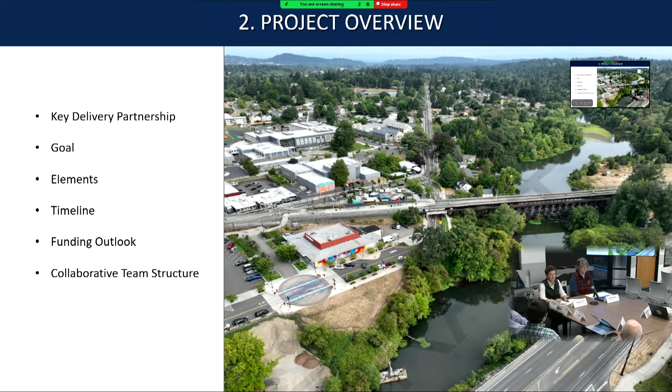Okay, so first up on project overview, we'll talk about the critical partnership that's needed to deliver this project, the project goal, the design and construction elements to achieve the goal, the project timeline, the funding outlook, where we stand now, to Robert, your question, and then the collaborative team structure that we have going on. So here are the four entities.

I know you're very familiar with these four. This composes our leadership team. Without any one of these entities, we would not be where we are today. So we have the Oregon Department of Transportation. No one else can actually hold a contract to construct a state highway bridge other than ODOT. So ODOT's involvement has been absolutely essential, dating back to Tova Peltz in 2021, and it's been a great partnership. ODOT owns the State Highway Bridge, and then we have the City of Milwaukie, owning most of the project footprint.

And obviously the outcomes of this project, the benefits of this project, are going to be realized by the residents of Milwaukie and the surrounding community. So not without the City of Milwaukie, that's for sure. Then we have these NGOs, right? So we have the local community presence here with the North Clackamas Watershed Council, who just brings so much capacity with community engagement, and Neil's done a great job of securing that initial seed funding and really demonstrating that community support. And we'll have a funding slide that really shows that here in a bit.

Combined with American Rivers, who brings dam removal experience and experience managing large-scale restoration, as well as leveraging funding dollars that are not traditional to ODOT or the city in the restoration realm, and bringing that project management expertise has been really key.

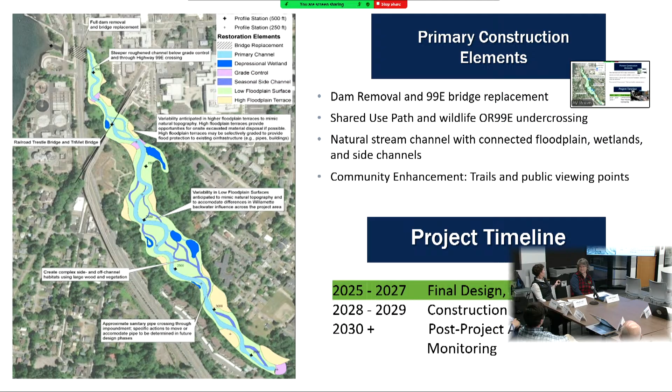So we can't control everything, right? And like you said, there's been some wrenches thrown in since January of this year. So what we can control is we have this funding and we can get the most value with that money and complete final design and get everything as planned and as far along as possible, so that even if we are not able to secure all of the construction funds, we'll be able to pick it up and save a lot of money when the project can be constructed. If we don't get all the funding, we're still motoring towards that goal. And we'll talk a little bit more about that later.

Other things about this. So thank you. In your letter, you clarified how the city's funding that was provided, the $1 million, is from the URA funds and how that could be spent. We understand that can't be spent on sewer relocation or in the upper impoundment, but needs to be spent on the lower portion of the project. We didn't have that information, so that was really, really helpful to hear.

That $1 million is so important because it really demonstrates the city's commitment to the project to other partners and other funders. And it really helps leverage additional funding. So it's helped leverage the Metro funds. And then collectively, the Metro funds and the city funds are really useful for leveraging those federal dollars because they're non-federal. So $1 million is not nothing, right? For this project, it may seem like a little drop in the bucket because of the price tag, but it is so critical coming from the city to have that funding.

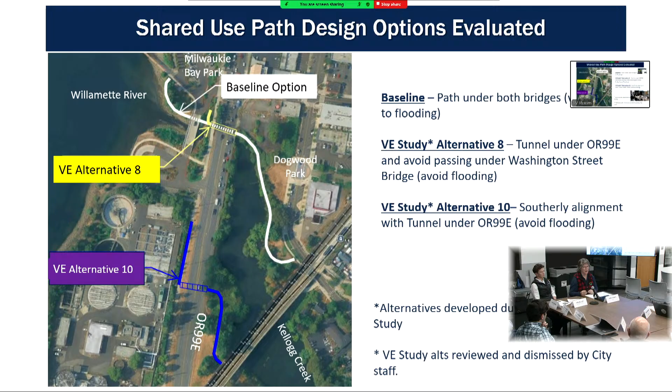But the problem is that the ADA design cannot be met coming up between the two bridges, and a tunnel is very confining and concerning. We'll go into more detail there. They also looked at another alternative with a tunnel all the way south. That ultimately doesn't meet the goal either, because it doesn't connect the parks. But that gives you a sense of what the VE team was looking at.

So let's go back to the baseline concept. This is the plan view alignment. It starts where the marked crossing is at Milwaukie Bay Park, drops down underneath the Washington Street Bridge, goes underneath the new OR 99 bridge, and meanders along. I have the Coho Point developer's preliminary wall in there because that was influencing what we were doing. Coho Point timing is a little up in the air, so it will probably be less of a constraint. But at the end of the day, it comes up to Main Street.

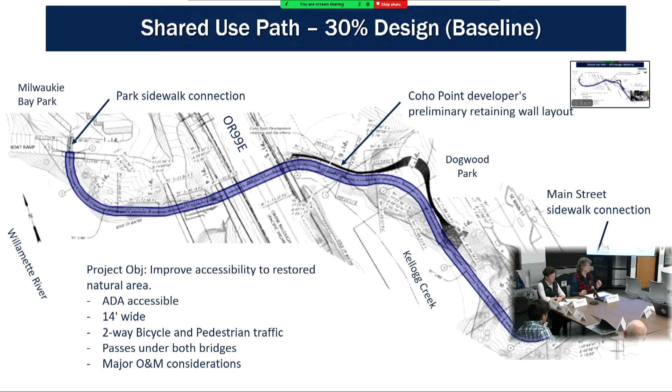It's a 14-foot wide path. We're following ODOT's ADA design standards for width, for maximum grade. So this would provide two-way bicycle and pedestrian traffic. Like I said, it passes under both bridges, but there are major operational and maintenance considerations that you're going to see here shortly. And here it is.

Is that the bridge, that's what you're calling the bridge in the park? Yes, sorry. We've never called it that, so that's a new name to us. Okay. It has several different names, so I apologize. I think on Google Maps, it is called Washington Street, and Tessie actually once asked me, can we change that? That makes no sense. It makes no sense, yeah. What do we call it? The Milwaukie Bay Park bridge? Whoever provides the funding for this, we're gonna name the bridge after.

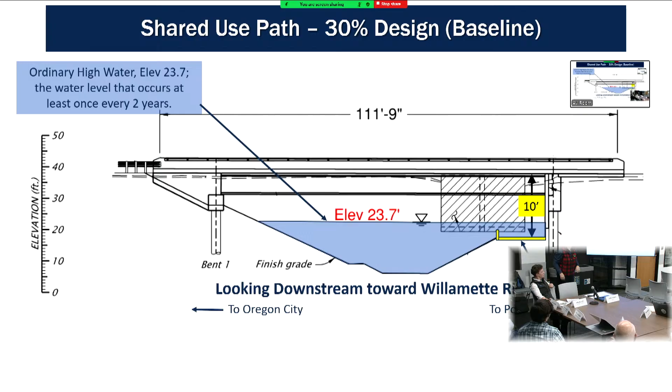But this channel is essentially going to be the same channel that we carve out underneath the Washington Street Bridge as well. But yes, the trail will have more inundation. It'll be deeper, it's lower. In fact, let me go back. Here's the Washington Street Bridge, so you've got that much flooding, and then here's the 99. It looks like it's over 5. Yes, about 6.5 feet of flooding, almost 7 feet of flooding.

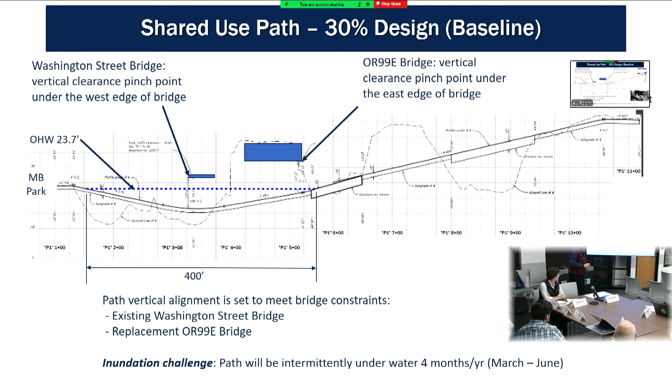So again, I don't want to be overly dramatic, but from a maintenance and operations standpoint, these are important things, I think, for the city to think about, to make sure that you're realizing everything that you want to realize with this project. It's going to take resources to manage, and we understand. Yes, that's a good range.

I don't think we have to solve that tonight, but you have to realize that there's a couple ways to skin this issue. If you want to be super responsive, then you're checking the weather all the time, you're checking the water level, you open it and close it. That's quite frankly manpower intensive and quite frankly risky.

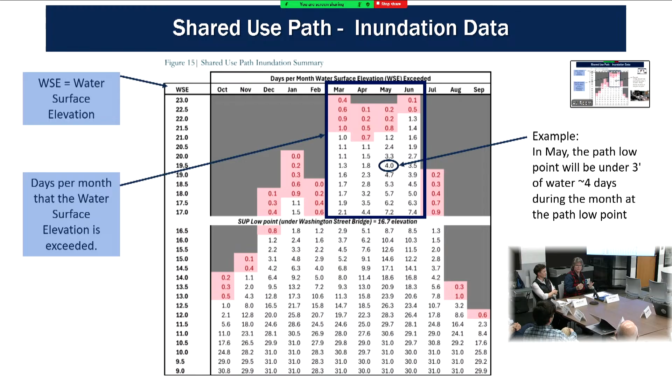So what does that closing look like? Is it bollards? Is it a gate? And that's where it comes into the design consideration. You can crawl over a bollard. You can't, and so if the city really wants to close it, that's, I think, the thing: what does that look like? So that we make sure we consider all of those things in our design.

So I just wanted to show you a little bit of a close-up of these value engineering alternatives. All that data, that's what the value engineering team saw, and they went, oh, holy cow. Can we come up with a better way to do this and still meet the project objectives? And at the end of the day, they had an idea for a tunnel under 99, but the connection grade that you can see between the two bridges doesn't meet ADA. So it's infeasible.

And the tunnel that's 10 feet tall and 16 feet wide and 115 feet long would be incredibly confining and probably a safety concern for the city as well. So with that curve, it doesn't meet the 10% grade.

So I was thinking, could it go across the actual existing bridge somehow? But that wouldn't be. The grade we're looking for is 4.5%. So this is more than double, twice as steep. Yeah. The other issue that one of my funny engineers said, if you did this, you get a kid on a skateboard coming around that corner and then whammo right into the tunnel. That's probably not a good thing.

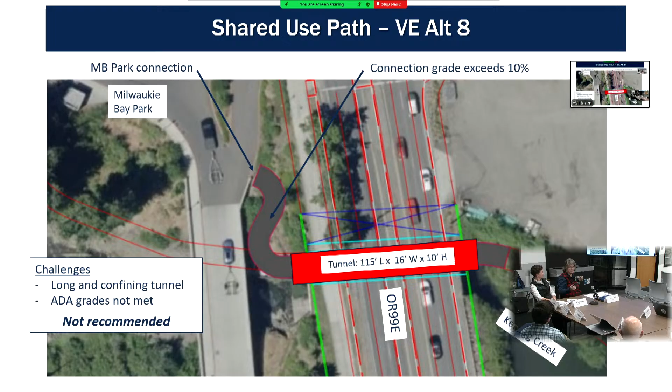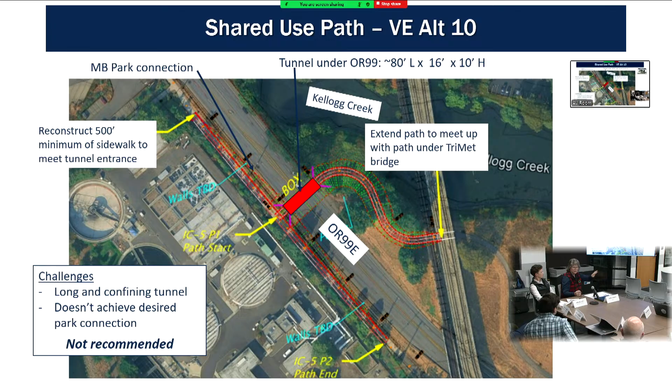So at the end of the day, not recommended, and I think city staff supported that as we talked through it. And then just another close-up of the other value engineering alternative. This one is another tunnel, but it doesn't achieve what you're looking for, which is an open path to enjoy the restoration. So we just went, okay, thanks, but no thanks. So not recommended.

Okay. If the tunnel is up, and it's above that floodplain level, could it conceivably be open, like at 4 feet or something, and have an open view? Or no? No. It would have to be fully enclosed, yeah.

One of the things that happens, and we talked a little bit about some solid rail, like why can't you use some solid rail, almost like you go to an aquarium, that's really cool, you see the water on the other side and you're walking over here, but as the water comes up, you end up trapping fish. So it helps for certain things, but it doesn't help for others. Yeah, I think the debris. Yes, debris. To get your permits, the regulatory agencies really want to see that debris can pass through there and everything.

So where we are, to kind of summarize what we're doing with the shared use path, we're continuing to advance this baseline design concept. I think it's the closest to achieving the goals of the project, but it's going to need some active management and some city resources when it's actually in use. And the design team needs to understand what that looks like, so we can work those things in.

And then I wanted you to recognize that it's about a $100 million project. It's a $15 million path. This is 15% of the project. That's a lot. So we want to make sure it gets done right. If that amount of money is going to be spent, let's make sure we do it right. And we just want to make sure we're not picking up a design and putting it back down, or making a change because another decision was made. So as we're involved with meetings with city staff, we're just asking for a little bit more input on the maintenance and operations.

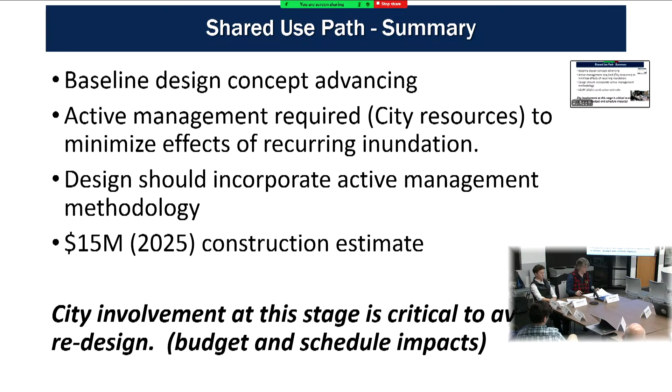Okay. Is it okay moving on to the sewer line? Not nearly as exciting. I'm sure this path is way more exciting. We love wastewater here.

Can I clarify some things with the shared use path? You're saying a retaining wall or something to make it flood for fewer days per year isn't possible because debris would be caught or fish would get caught in it. Correct. So there's really no way we can design around this. The path will have to flood for about a month every year in total days. Yes, across the 4-month period.

And it might be worth hearing from Shelley, being in the transportation realm, about other bridges that have trails under them and some issues they've experienced. Yeah, there are tunnels over in Portland, there's been homeless camping, there's been people who have experienced assaults or crimes. And so it becomes really challenging from a maintenance and a public safety perspective. So that's something you may want to consider when you're talking about the tunnel. You can put flood warning signs, but 3-4 feet of water, that's pretty significant.

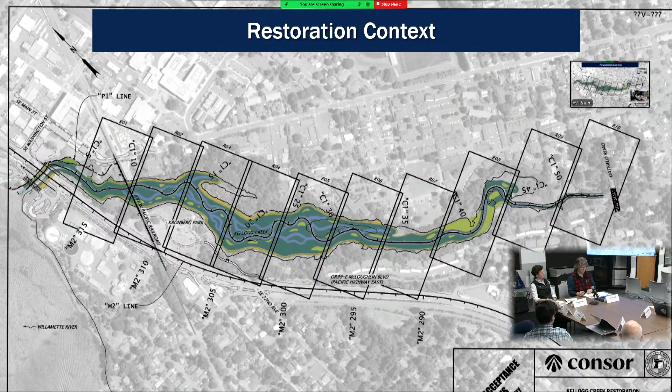Okay, so it all starts out with trying to make sure that we're achieving the restoration outcome that everybody wants. And the creek restoration is really split up into 3 different reaches, which I'll show. But here's a nice glory picture of the impoundment, and then Inter-Fluve did this fantastic graphic that really shows what you're trying to achieve. It kind of warms the heart, like, this is why we're all here. So that's what we're trying to get to.

So as I mentioned, the restoration design really considers 3 reaches in the engineering terminology. There's an upper, middle, and a lower. The upper is really connecting the existing creek at Oatfield Road down to the sewer line crossing. That's a point where the dynamics of the creek change. And so you can see it's kind of just a creek in the upper reach. It's primary, secondary, tertiary channels, lots going on in the middle reach. And then the lower reach is just connecting into the Willamette River.

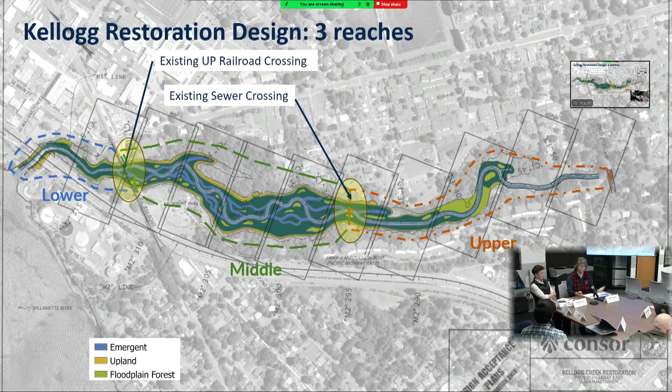But because of that change from the upper to the middle, to really achieve what we're all trying to do, the sewer line is just at the wrong elevation. And here's a profile of that. The dash line at the top, another engineering drawing, is the mud line, if you will. That's where the soils are today. And the lower solid line is the creek channel. You see some little dips down, those are pools and riffles and all kinds of restoration stuff. But I'm pointing to where the sewer line sits today, its elevation. And it sits squarely above where we want the creek profile to be.

I think one of the questions that the council asked was, have you looked at adjusting the creek profile so that we don't have to do anything with the sewer line? And the answer is yes. From an engineering perspective, if you try to raise the creek channel that you designed, you're not going to achieve as much in the middle zone, which has all the different channels; that's where the money is in this. And then the upper reach, you end up having to chase up Oatfield Road further. So you extend the project way up Oatfield Road, and it just becomes more complicated. So that Oatfield Road location is a very convenient connection point.

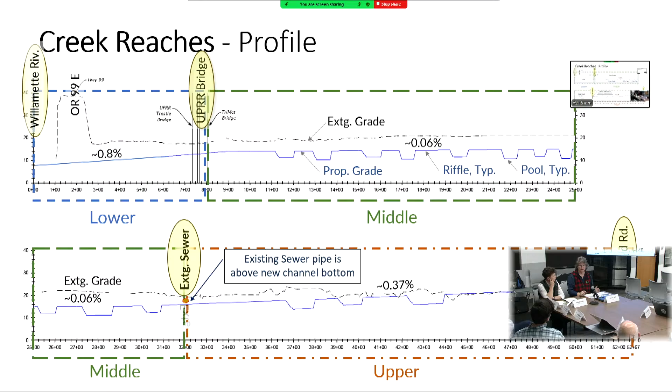And then if we dropped it down to where there was enough clearance and leave the sewer line in place, at the westerly end of the middle reach is the Union Pacific Railroad Bridge. And so you end up adding a risk because you're excavating more at that location, which is going to be a concern. So all that to say, we think we're in a sweet spot here with the restoration design. It's been scientifically designed from a maintenance perspective and a natural adaptability standpoint. We're trying to achieve a design that you can put in place; it's not gonna be maintenance free, but it supports itself. It has the right grades, it's natural, and it becomes its own thing.

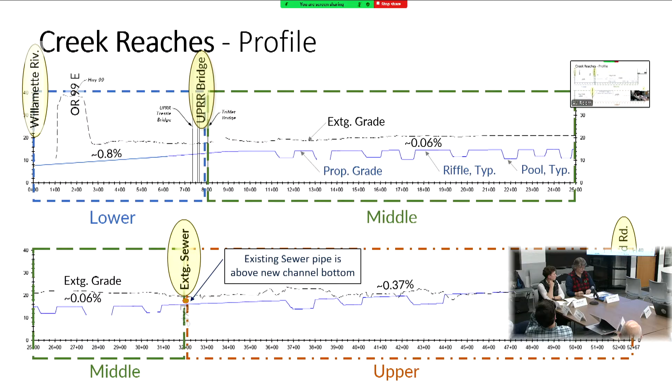So what we concluded is, something has to happen with the existing sewer line. So here we are. This shows where the sewer line is. It takes sewage from an apartment complex underneath Kellogg Creek into a county WES system out to the water treatment plant. Is it taking just from an apartment complex, or is it taking from that whole area in the yellow dots? It doesn't take from all the area in the yellow dots. Peter might be able to... I mean, it's not the full area, but you can see.

I think it's pretty extensive though, maybe not all within that sewershed, but primarily. It's not a single facility. Yeah, we've got several lines that all converge. And it's an 8-inch line, so it's not tremendously large. I'm sure you have larger facilities than that. Right, yeah. 8-inch sewer line.

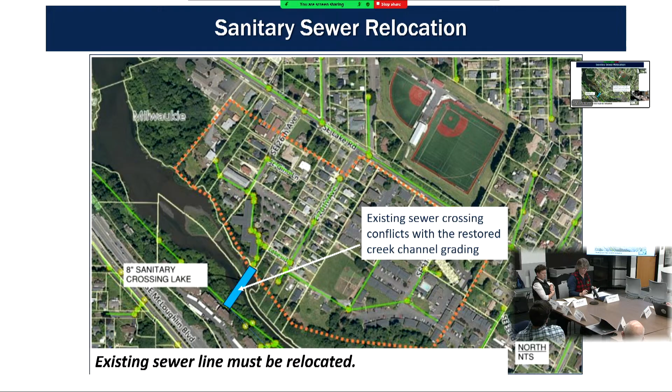Okay, so when we started analyzing, and we have subject matter experts in Consor who I think have worked for the city and worked for a lot of cities and a lot of public agencies in the area with sewer systems. It's a gravity flow system that connects into the WES pipeline, as I said. The city shared with us when we came on board some inspection data, and I think somebody tried to run a camera through that line, but they hit a spot where the camera couldn't go any further. And that typically is due to either a blockage or there's some sort of sag or kink, if you will, in the pipe. Neither of those is.

So we've been talking with city staff about, when would that pipe naturally need to be replaced? I think we have maybe a little bit of differing opinion. We think it's closer to 10 years. I think city staff think it's closer to 20 years. But at the end of the day, you're still within your planning horizon. So if this pipe was to be replaced, it's not being replaced prematurely.

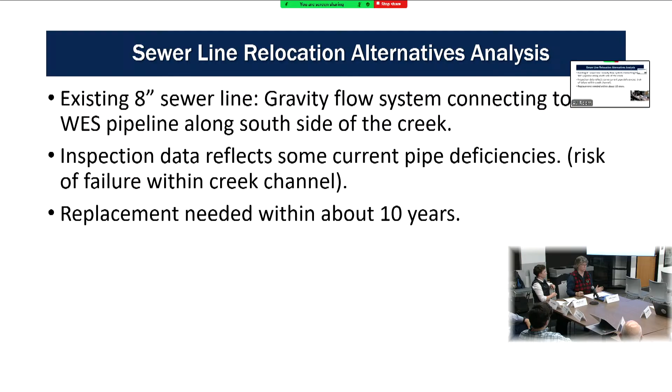So we looked at adjusting the creek profile, so there was no relocation. I talked about that really wasn't feasible. We looked at alternatives to take the pipe on its current alignment, but just go underneath the creeks, like way down underneath the creek, and then over the creek, and then out of the creek, that's the relocate the sewer line. It's like just move it out of the creek.

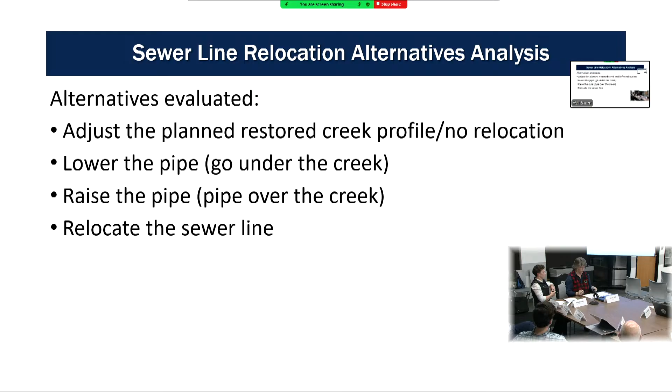So as we looked at those alternatives, we worked with city staff to look at not just what the current sewer flow rates are, but what's planned in the future. So we make sure that we're thinking about the size appropriately, making sure we're meeting the project objectives, minimizing city long-term costs and liability. That's always a consideration. Construction cost and timing. And then again, there's costs that are coming your way at some point. And so the costs we're looking at are really within the horizon.

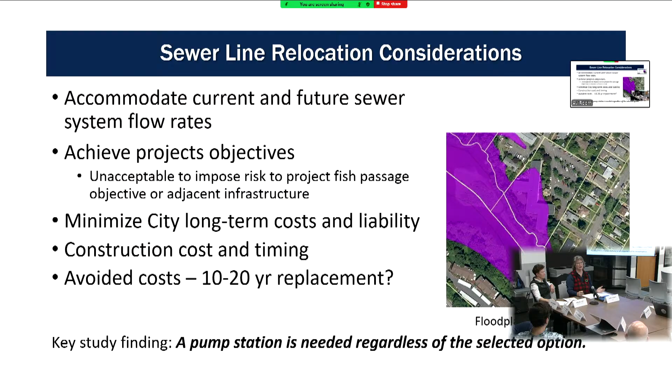And one of the key study findings is that no matter what we do, we can't maintain a gravity flow, which is the simplest, the most cost-effective system, if you will. You're going to have a pump station under any circumstance. So the major options, kind of talking through lowering, again, can't do a gravity system. We need to have a pump station.

We looked at a pressure system, and okay, I will say I am not a sewer line designer, so I don't know what all these mean. Jen and Peter probably know a whole lot more to answer those questions. But a pressure system also isn't feasible because the flows are too low. So you need a new pump station and you need a new force main. So we do have a feasible option that goes way down underneath the creek. And I think actually the pressure system should be siphoned.

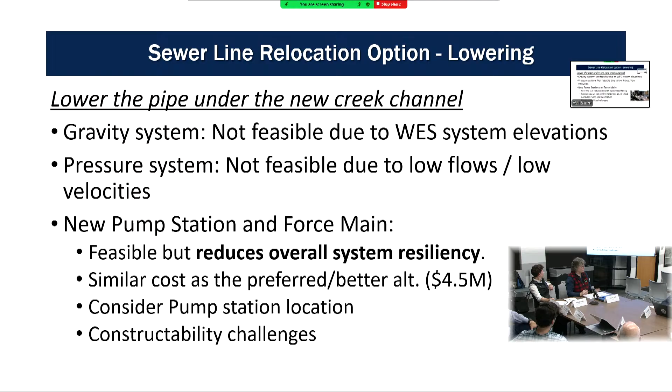Oh. Thank you. Yes. So I want to acknowledge that there is an option that goes way down underneath the creek, but it's a similar cost to what we're suggesting as a recommended alternative. And doing that way down underneath the creek has several constructability challenges that we would have to face.

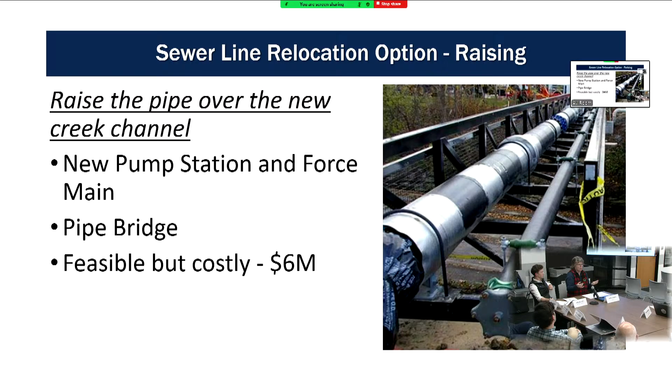So raising up and over, this is what a utility bridge looks like. It's feasible, but it's very costly. And you end up with this kind of eyesore, and as the creek comes up, you're gonna always worry about debris and kind of attractive nuisance.

So when we looked at realignment, we think that that's really the best option. Get the pipe out of the creek, tie into the existing system, add a new pump station with a force main, and we can work with city staff to figure out where's the best place to put the pump station. But I think this really provides the lowest risk overall, has the best value, and it provides the best long-term maintenance and operations because it's out of the floodplain. We can set it up to where it's accessible by maintenance staff, and if there was a problem, you're not having to go to Pleasant Street.

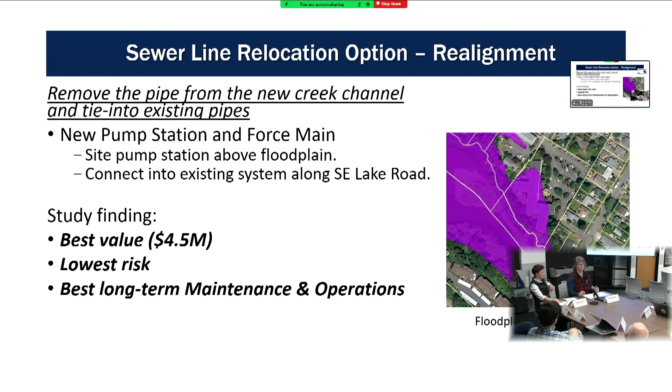So this is the alternative that we're recommending to staff, and I cannot reiterate enough that we are still working through all of this. There's no decisions. We're not looking for an immediate decision. There's still a lot to talk through, but this is what we're suggesting. Here's the solution. Pump station at the end of 28th, and then it connects into the existing system, replace some sewer lines, and then it sends the flow up to an existing system on Lake Road.

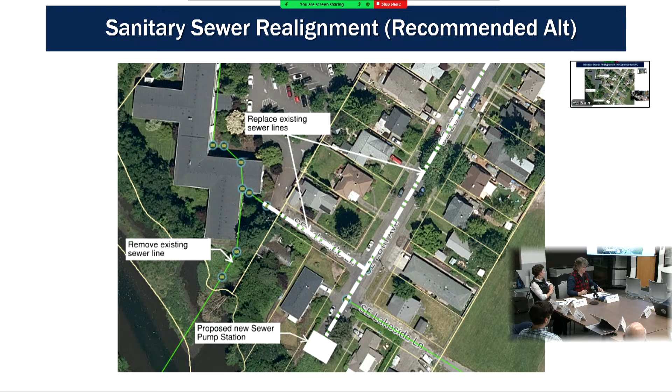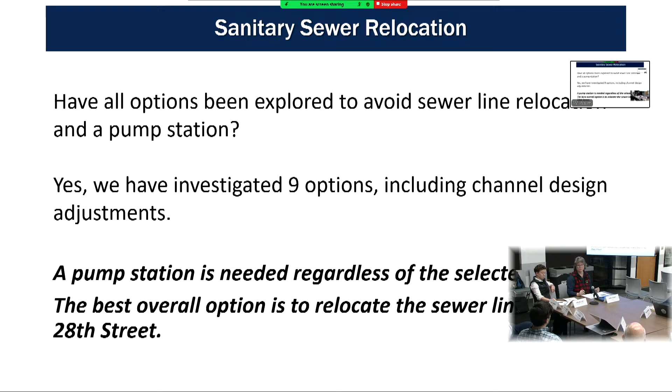So kind of going back over some of the questions: have all the options been explored to avoid relocation and a pump station? Yes. We investigated a total of 9 options, including a channel design adjustment. A pump station is needed regardless. So a pump station just is not going to be avoidable in any circumstance. And we believe the best option is to move the sewer line and put the pump station up on 28, and that's what we were showing.

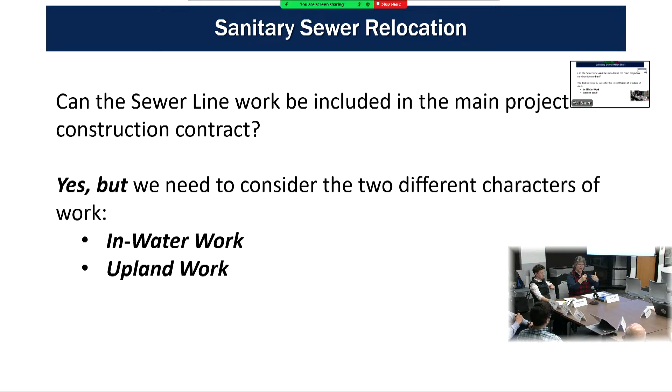I think one of the other questions, and this one we're not able to answer, but I'll give you a little bit more information, just things we're thinking about: can the sewer line be included in the main construction project? The answer is yes, but there's a big but there. There's 2 different characters of work going on. The water demarcation of elevation 23.7 is very important from a permitting standpoint. If you're working below that, you have to get in-water work permits. Above that is upland. We call that upland.

Sorry to interrupt, but the permitting for in-water work is extensive. It takes a lot of specialized expertise. We had all the permits you would need from local, state, federal agencies to just do the sediment sampling, like 13 permits. It is a lot. It costs a lot of money. We had specialized amphibious equipment. So depending on what alternative is chosen and how things shake up, it is a big lift. That effort alone was close to $3 million.

And when you think about replacing the sewer system, the existing system has to remain in place and operational the entire time you're building a new one. So you build a new one, and that's all the pipe work and everything. Then there's lots of testing, and then there's connecting it, and then there's removing. In order for our main construction contractor to really start their work, they're gonna start at the upper end. If you think about lowering the lake, they're gonna work from the top down. So the sewer line getting out of the way is a very early critical item. So there's a scheduling risk with when that's able to be removed.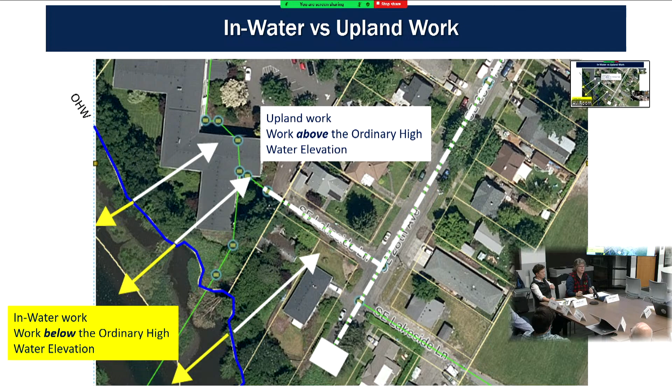Removing the pipe would be in-water work, and the restoration is all in-water work. So we're working through the permitting for that. So it's sort of a no-brainer to include removal of the existing sewer line, when it's ready to be removed, in the major project, because we're already accounting for that permitting, as April just said, numbers of permits and cost. But the rest of the work is upland work. It's not permit free, but it doesn't have the same in-water permits.

Okay, so I think what I want to leave you with is we think there's a lot of long-term maintenance and operation cost advantages to getting the pump station and the new infrastructure up out of the creek. It will help long-term, but it also helps with the work that needs to be done in the creek. There's still a lot of discussion with city staff, with ODOT staff. I will leave it at that. We can't solve everything. It's going to end up being probably a risk-based solution, risk assessment. We're looking at it from all the angles.

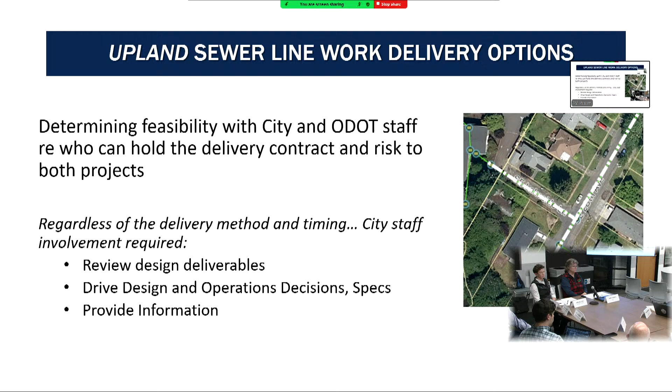Yeah, it was incredibly helpful, and I super appreciate how you distilled the complexity into something we can address. I know you said, Karen, we're not answering it tonight. We've got a lot of work still to do, but I'm sure you've heard from my staff, we have a capital improvement budgeting process. So is there any sense you could give us on milestones or deadlines for when you need to know various things? I tell my staff they can't make commitments to you unless we get direction from council. Any clarity on when those decision points need to happen is really helpful, so we can engage most effectively at the staff-to-staff table.

Yes. Well, that's a great transition into the next slide. I'd say right now, the work that Peter and his folks are planning to do to evaluate capacity, the downstream siphon, and some of the input they're going to be providing is what's really needed right now.

Okay. While that's happening, we're going to be working on this delivery pathway angle, because we're just looking at major risk to both projects, right? And needing the sewer line to be online before the restoration work can even start. And then try to convey that to funders. They're just like, do we want to fund this? So, there's a lot to be done.

But stepping ahead to next steps, kind of down there at the bottom, one of the biggest things that Peter took back to his team was looking at the clean water revolving loan and saying, hey, what benefits could we get from pursuing this? And then I would be working with Peter on how we can leverage existing funding that we have and things like that. And then at that point, if it's beneficial, adding the sewer relocation to the CIP before the April deadline, because we have to submit that application in April, would be the timeline we're looking at for the next step.

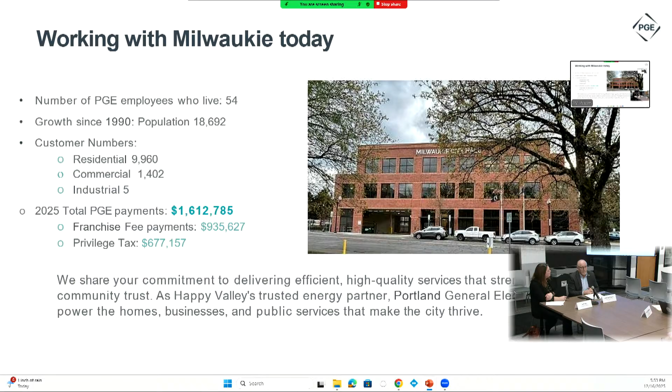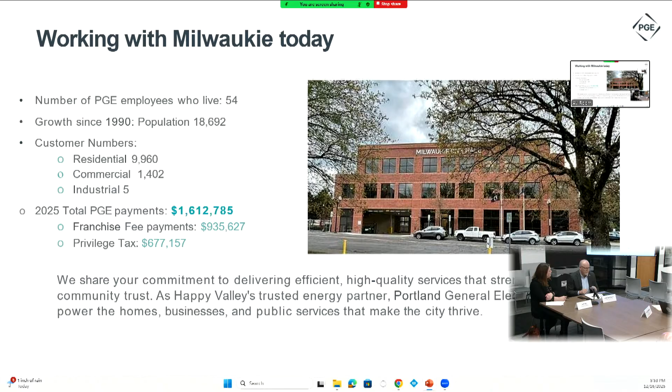So that's where I'll spend my time. I can't wait 21 years. I don't think I have that much of a career left. So I mentioned those things to say the system is changing. The dynamics of the system are changing. We talk about, again, storms, extreme weather, cyber attacks, earthquakes, a Cascadia subduction zone earthquake.

All of these emergencies, if you will, weather, attacks, et cetera, we're trying to think: how do you get resiliency? How do you gain the sort of reliability in the system that we need? Because we are all dependent on this commodity, and it's really important for us to maintain that resiliency. And so we're trying to dig in each of these areas and say, how do we harden this?

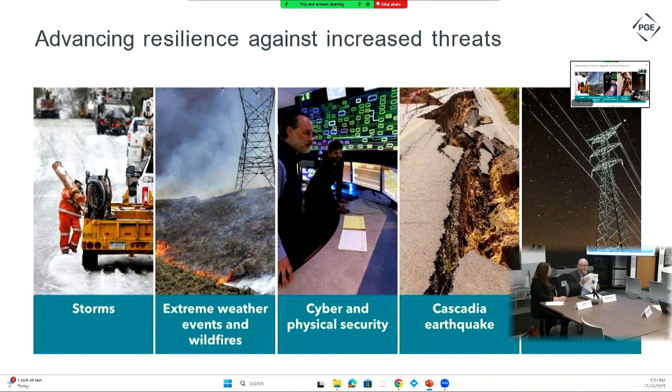Our assets are old. In many cases, we asked the Engineering Society, and they gave us a D- because of the age of our assets. And like bridges here, we all know that it's going to take a lot to reinforce, but there are some things that we're doing in resiliency.

Batteries is number one. We've now installed 500 megawatts worth of batteries: 200 megawatts in the Troutdale area, 200 megawatts in the St. John's area, 75 megawatts in the Hillsboro area right now. Then there's some smaller ones that are spread. And so that's 10% of our peak capacity. But really what it does is it gives us flexibility that we haven't had.

We've had a little bit of it in the hydro. Grand Coulee for the Northwest is kind of the one reservoir that holds a significant amount of water. Many of the other dams are run of the river, so that just means they're passing through. You don't get to hold a lot. But batteries give us the ability to hold the electrons, and that's new for us. The gas industry had storage. They had pipelines. Put things in tanks.

So now what we're going to do is take the wind, the solar, when it's operating, hold it in a battery, and then utilize it in the system. A great example of that is California. California put in 17 gigawatts now of batteries. So we're a 4.5 gigawatt system. They've got 17 gigawatts of batteries. California's 52 gigawatts, so more than 10 times what PGE is in terms of our size.

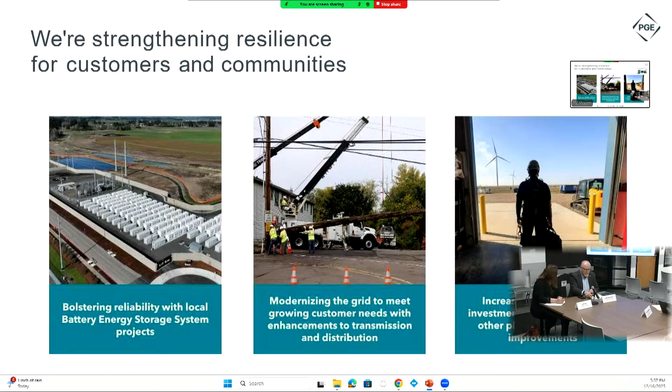So technology, I just share that to say technology can really help us bring the price down if it's done right. And that's what we hope to do with the team. We show here modernizing, we also talk about the resiliency. So we want to get the most out of the system that we have, and again, try to keep it affordable.

Wildfire certainly has been on everybody's mind. The urban areas, Milwaukie, still there's concerns, but not quite the same, other than, I'll just lead on to, like Forest Park. There's a huge park next to urban areas, not a lot different than LA, what we saw in the LA fire. Once they get started in the homes, they're jumping from home to home. It's next to impossible. So how do we think about it as communities? How do homes, standards of homes, buildings of homes, how do we consider wildfire?

But one of our best preventions has been public safety power shutoffs. So Mount Hood, I didn't believe in it prior to Labor Day of 2020. I grew up in Montana. Douglas fir was, you had wildfires and you controlled them and you just knew that it was going to happen. But I'd never seen the damage it could do. And so Labor Day of 2020, we turned off Mount Hood. And that was a hard decision.

I'm not the one that wants to turn it off. We had to make that decision. But it was the best decision we ever made, because the fires that took place, as you saw further south, were devastating. And when we went back up into those communities, trees were down on top of everything. And we know pretty well we would have had the same sort of thing. So we learned our lesson, but how do we do that in a really controlled fashion, by science, giving us the best determination to do that quickly?

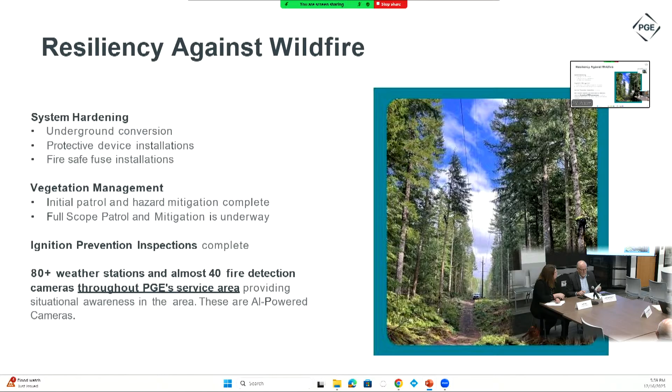I'll turn real quickly to what our energy is, and 45% is non-emitting. There's 13% on top of that that, quote unquote, we treat as if it is carbon emitting because we don't know. We're buying it, it's coming out of California. Even though it might be coming from solar, we don't know that for sure. We have to claim it as being emitting. So we're trying to get better and better at that, so we know exactly where it's coming from. Just paint the electrons, which one's green and which one's worse.

Sorry to interrupt. How long are we scheduled to stop? Well, we're scheduled to stop now, but you got a 10 minute late start, so we'll give you 10 more minutes. A little bit more. Okay, thank you.

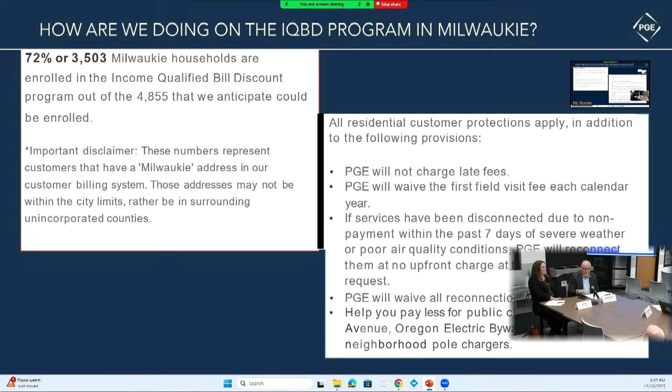So the last one I did want to talk about, because I know we sent in a letter to the commission on UM 2377, which is data centers. And through the last legislative session, working with the legislature, we created a separate class for data centers. We didn't have that before, so that was created, which then means we can have a separate rate with them. And we're also, as I mentioned earlier, looking at cost causation. So figuring out, number one, you're impacting the system, how do we make sure that you're paying? Two, they might come in for a few years and then boom, they're gone, and we end up with stranded assets. So how are we making sure that we cover those costs, so that all the rest of the customers are not paying for something that they left behind?

And then finally, I'll say the rate structure itself. There have been some articles here recently talking about 3 years versus 50 years. 3 years is in line with the Fair Act that was passed. We can't file for rates.